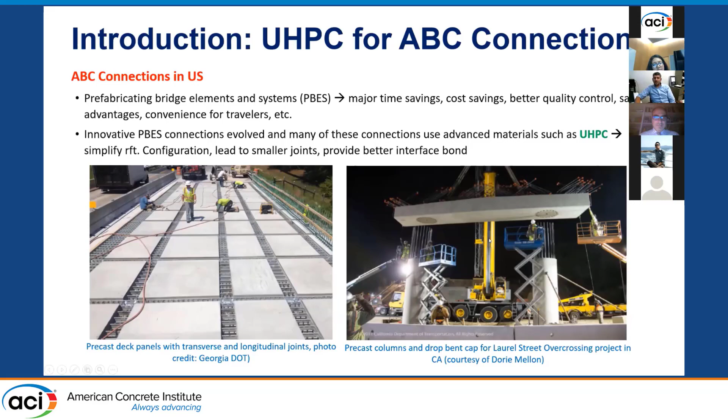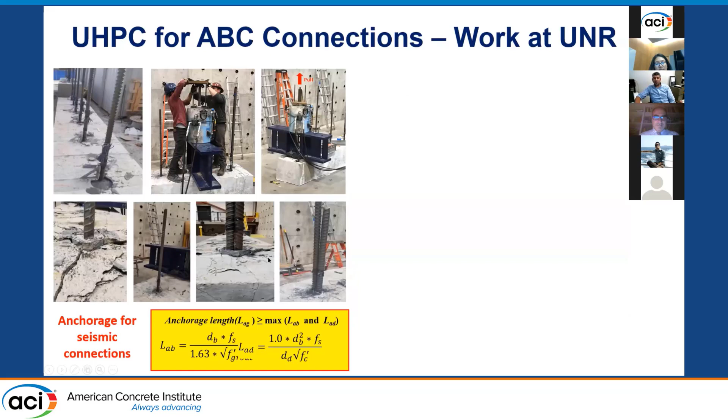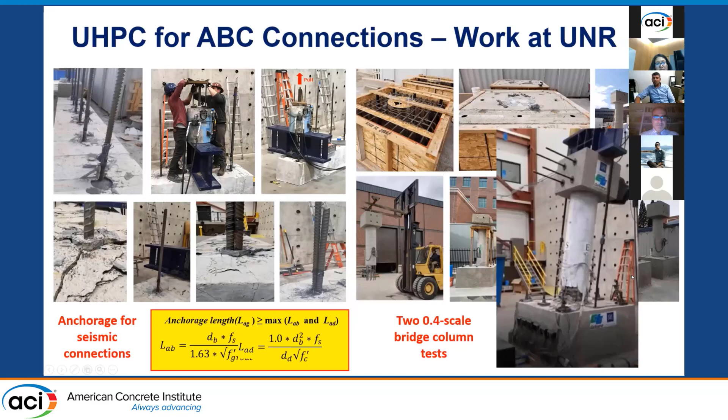At UNR, we did a lot of work on both, developing non-proprietary UHPC specifically for Caltrans for this type of joint, where we did anchorage testing specifically for large diameter bars up to number 10. We developed an equation for the anchorage lengths, then used this for 0.4 scale columns, and tested them to make sure the column would develop the plastic hinge as intended. That's one example I'm not going to talk about today.

The other type of connection we are working on is the non-seismic or bridge deck joints. I'm starting here from the end of the project, before going to the material part. What we eventually got to is that we had 9 pairs of precast sub-assemblies of bridge decks with transverse and longitudinal joints with different designs, detailing, and materials.

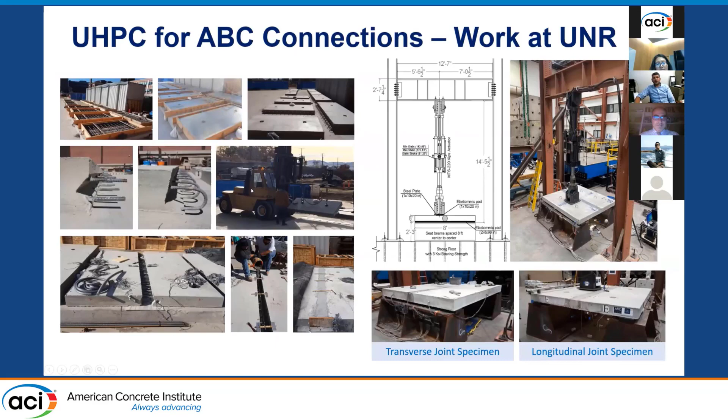I'm sharing one example here to show the comparison between a non-proprietary and a reference commercial UHPC. We know commercial UHPC works great, but for research options and the bigger benefit of the community, we wanted to show that other options would work as well.

That's a head-to-head comparison, exactly same dimensions of the specimens. The only difference is that we used non-proprietary versus commercial UHPC in the mix in the joints, and we showed that the non-proprietary or engineered UHPC could lead to good behavior. So that was the end of the project.

But let me go back now, a year or two before we reached this stage, to where we wanted to develop the material itself and see what type of non-proprietary UHPC would work for this application.

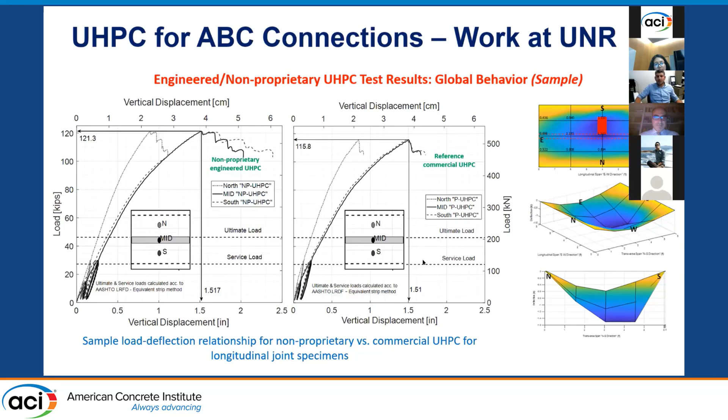As I mentioned, it's a multi-institutional collaboration among the 5 consortium members of the ABC UTC. This work was led by the University of Oklahoma in terms of the basic or reference non-proprietary mix for the UHPC, and then each university took on a separate role. University of Washington, for example, focused on shear panel testing. Here at UNR, we did full scale sub-assemblies of deck joints, as I mentioned.

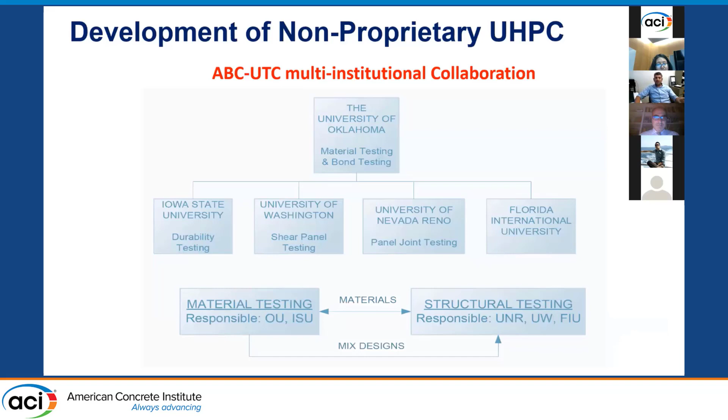Along the way, we found that it's beneficial to do some side material study, which I'm going to share with you today. So we got the material.

Our objectives were to get the materials and the basic reference design from Oklahoma, and we wanted to reproduce the exact non-proprietary mix using not only a different team but a different mixing procedure. Everything is different because that's a separate team from the original design. So we wanted to see the repeatability and reproducibility of this mix.

On top of that, we also sourced materials locally from the western part of the country, from Nevada and California, wanting to study how material sourced from the western side of the country would lead to comparable results or not from what Oklahoma designed for the reference one. So we wanted to study the effect of material sourcing and variability, specifically the fine aggregate type and particle gradation, which I will show.

And the other thing is, even if we are using the same material that our collaborators at Oklahoma used, can we reproduce it if we are using different people, different mixing, and just see the human factor - does it reproduce or not.

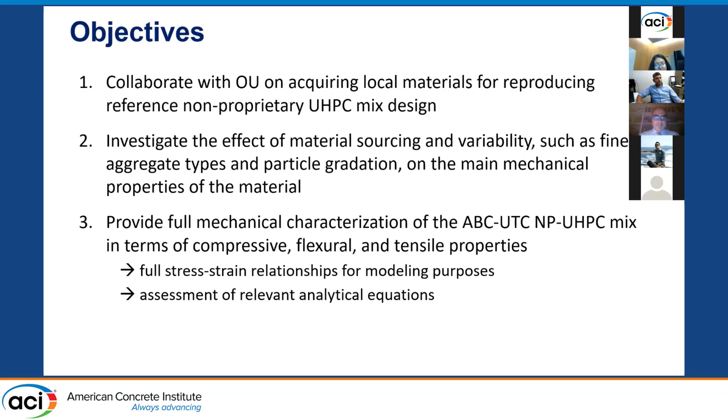And then we did a full mechanical characterization for what we call the ABC UTC non-proprietary UHPC mix, in terms of compression, flexure, and tensile properties, for those who are interested to use these results maybe for modeling purposes or assessment of relevant analytical equations and so on. So that's the non-proprietary UHPC mix.

And then we used steel fiber, 2% by volume for the basic one, but we also used 1% as well to show that you can even go with less steel fiber for these applications, specifically for the ABC-UTC bridge deck connections.

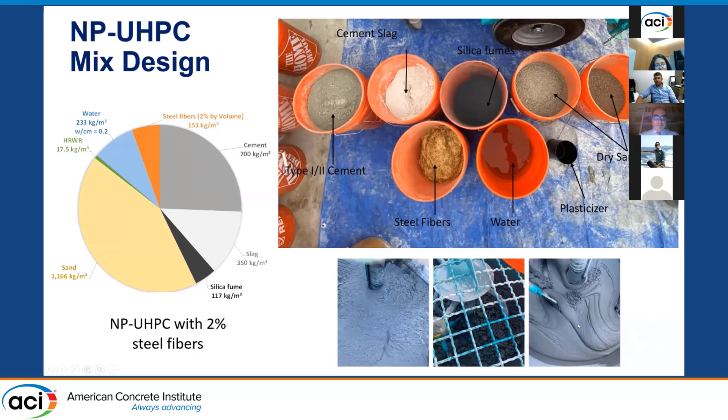So this is some general information about the mix. This is how you see it close to final state, before we furnish the material and so on.

So for the material variability, these are the sources that we used for our material. University of Oklahoma, as I mentioned, are the ones who started the mix design, and they provided us already with the materials that they have used. But in the meantime, we tried to source similar materials locally here in the western part.

So the cement we use is from a Nevada company here, the silica fume and the slag we got from Sacramento. And the main part is the aggregate. We used different types of aggregate here, but I'll just focus today on the crushed aggregate that we have used, because we tried using sieved and unsieved, and again wanted to see if this could lead to similar results or not.

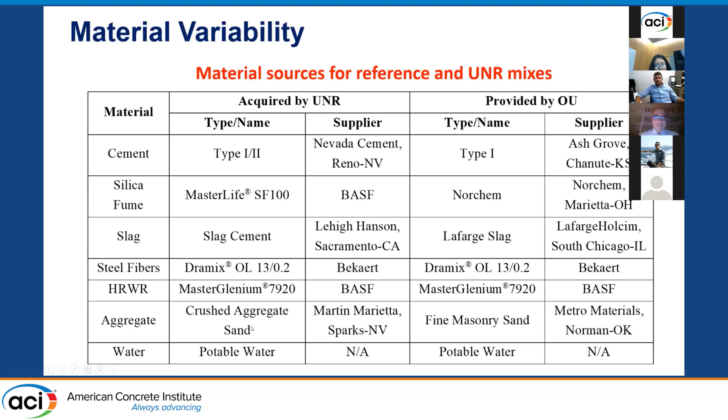For steel fiber, as I mentioned, we varied this as well, 1% and 2%, not because we are trying to walk away from high steel ratios of steel fiber or anything, but we want to show that steel fiber can be one of the components that can be optimized or engineered based on the application.

So in this example here that we did in this testing, we tested, for example, using the non-proprietary UHPC, 3 different joints for the transverse field joint as a sample here. And we wanted to see if we were to use 1% instead of 2%, from just some back of the envelope calculations and stuff like that.

We said that maybe this would come at the cost of increasing the width of the joint a little bit. So instead of the traditional 6-inch width we use for the joint, we went here with 8 inches. Not really a big difference, but we wanted to make sure that at least for 1% we have a little bit more lap length, and we wanted to test the two of them.

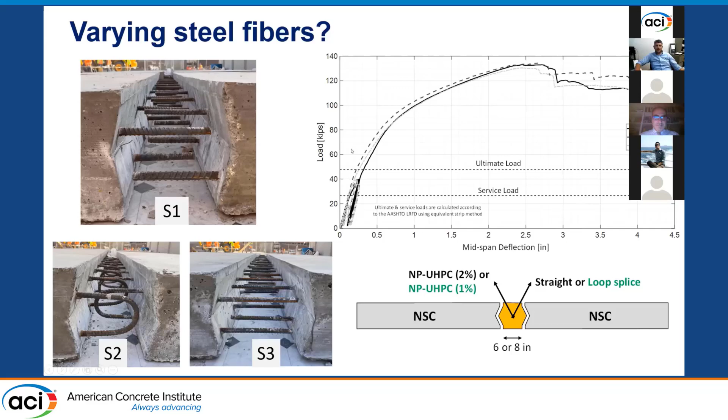The other part is the aggregate type and the particle grading. Again, UHPC - and I have heard this from several presentations today - it's all about the particle packing theory. So we wanted to show, on purpose, we are not after a 25 KSI, high-end UHPC. We want a practical mix for a specific ABC type of application.

So if we are not even going to do sieving for the sand - and you have seen here, these are very large particles - versus a sieved sand that we sourced here in the Nevada part, and then there's the fine sand that we got from Oklahoma, how these three would compare.

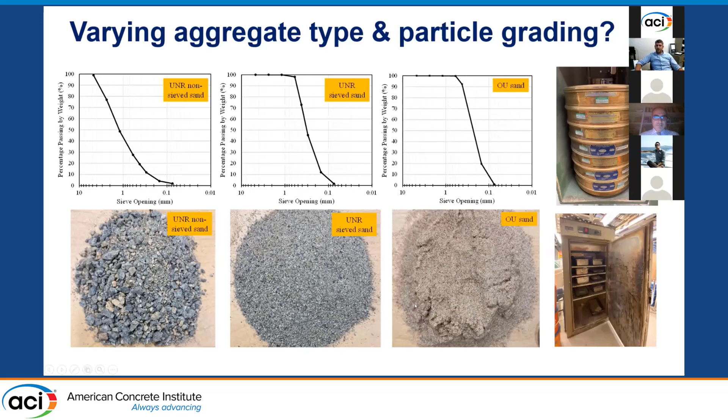So we did this as well, and putting all these things together, we had 5 batches that we tested: 2% and 1% steel fiber, using our non-sieved and sieved aggregate here from the Nevada region, and then we have the Oklahoma one, the materials that we got from them for reference purposes.

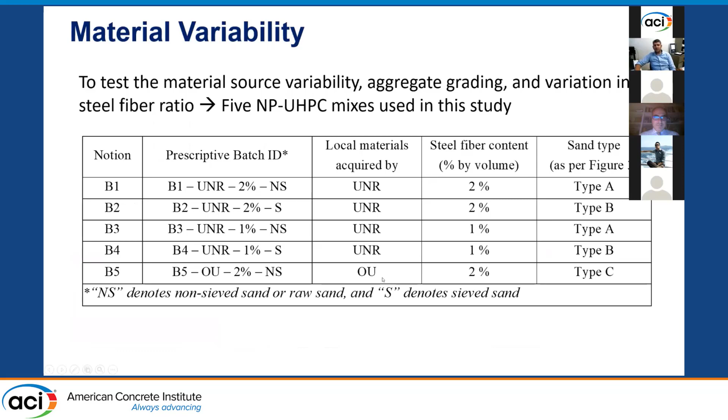And then we started our mechanical characterization campaign. We did compression, flexure, and tension. Again, you have been hearing about tension from the morning - there is no standard test yet. We are not actually after a standard test in this specific objective. Our objective is not to do the best tensile characterization, but rather do a comparative study. If we have 5 batches and we do the same test for all 5 different types of concrete, it's just a comparative assessment that we are doing here, as opposed to having a specific test that we know is maybe the standard results you would use for approving this mix. This was not our objective from the testing here.

So we went with dog bone samples with a 1x1 cross section, and the standard flexure test, we did the 3x3x12, and the compression, the 3x6 cylinders. We wanted to do the full stress strain characterization for all these types of tests and see how this would compare to analytical equations in the literature.

Most of the analytical equations have been verified for proprietary and high-end UHPC. So we wanted to see if these things are valid for non-proprietary mixes or lower-end type of mixes as well.

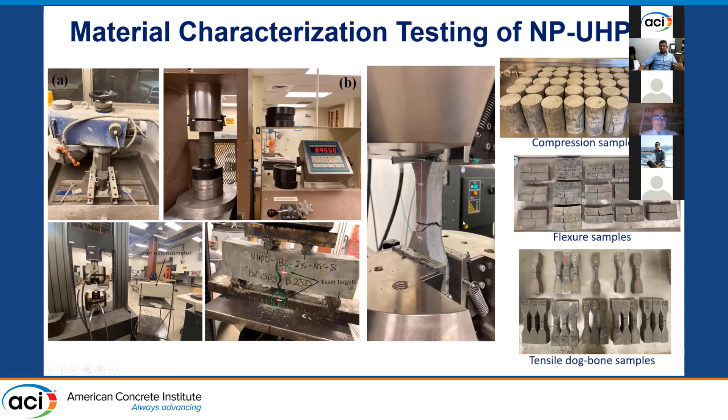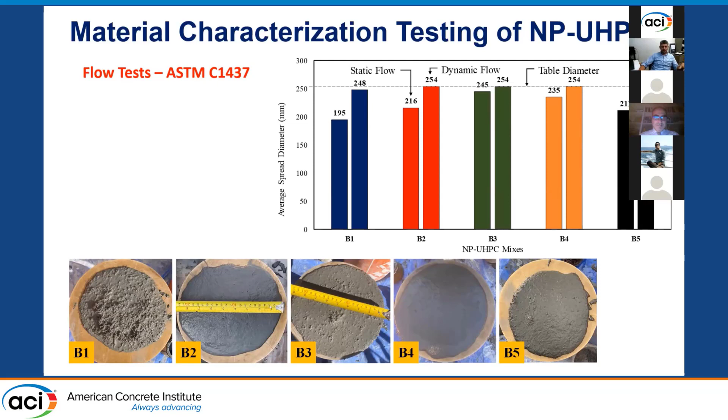So our target here was to meet the required or minimum required flow as well as other mechanical properties. Flow is not mechanical, if you can argue, but flow and other mechanical properties as well - that was our target here. They have the most practical, if you will, the most practical, convenient mix that can work for this type of joint. So we did the compression test.

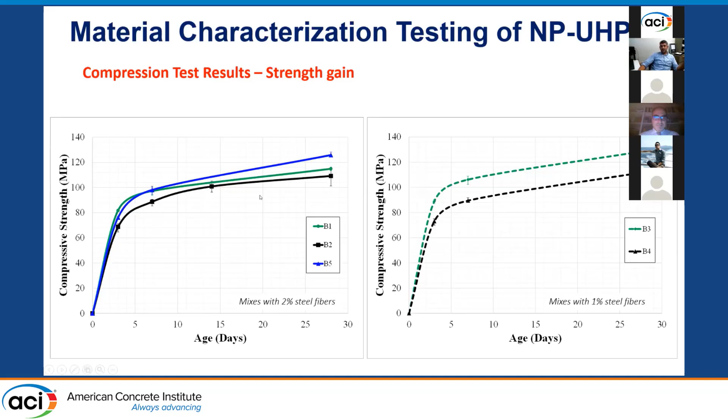So there are some results that we were able to get at standard times, like 28 days or so. Some specimens we couldn't test at 28 days and we had to wait until we were back in the labs. So for the compression, for example, the stress strain ones, we were not able to test these until almost 240 days or so.

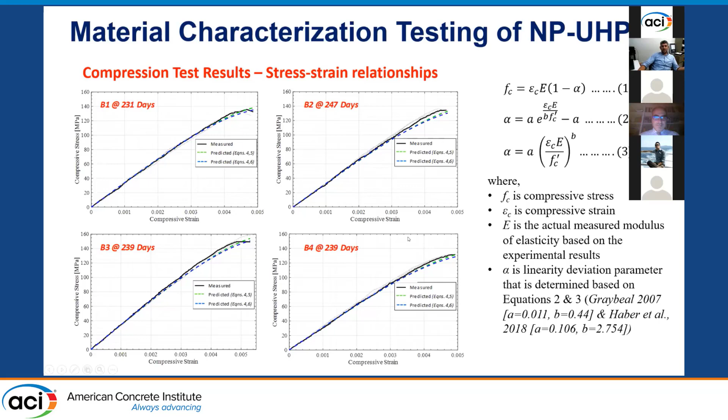But we have done this and we get at least the early part - this is non-confined UHPC and we didn't really care that much about capturing the post-peak behavior. We just wanted to at least get the initial part, which indirectly has to say something about the Young's modulus. The equations that Graybeal and the folks at the Federal Highway have proposed for predicting or estimating the full stress strain relationship in compression up to the peak - we show that this works for non-proprietary UHPC as well, and we did some assessment for the equations here.

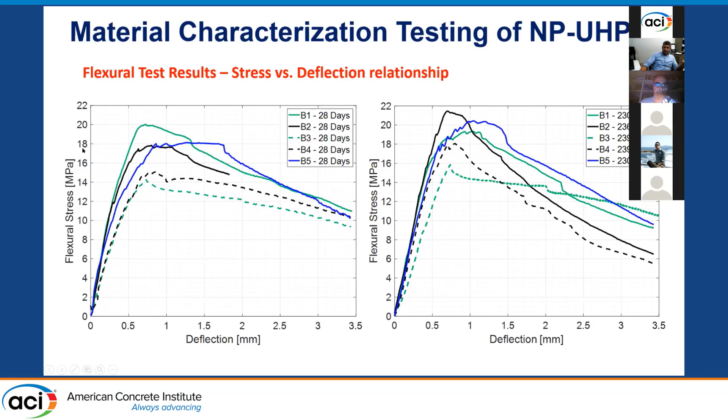You can see that in tension, it's not like compression - you don't really get a lot of change. From 7 days to 28 days, the increase in tensile strength was about 20%, which is expected and matches what we've seen in the literature, because the tensile behavior has a lot to do with the steel fibers as opposed to the UHPC itself or the cement.

So these are just some of the results here. Again, what did we want to show? The 1% and 2% obviously have different results. We wanted to show the general trend - if you focus on the very first part, you'll see some strain hardening, but we're plotting it all the way up to 5% strain to show that the ductility is there. The idea is to provide sample full stress-strain curves for this material using different batches, for those who would like to use these later on for modeling purposes or analytical assessment.

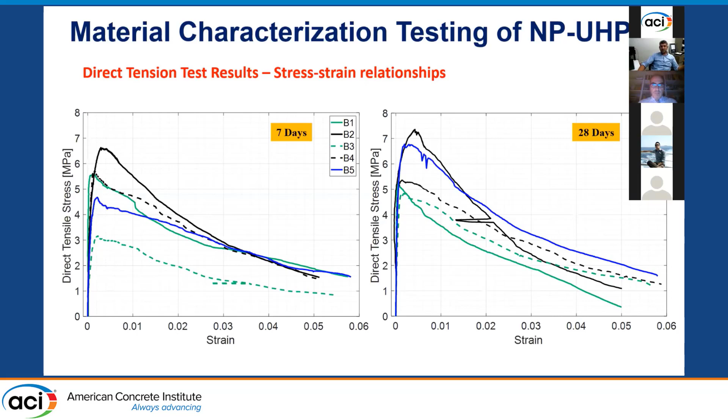So let me wrap it up with some concluding remarks. The basic characteristics of the mix designed at University of Oklahoma, based on Midwest and South US region materials, was successfully reproduced and replicated using a full independent set of materials, and even different aggregate types from Western US, which is encouraging for all these developed, emerging non-proprietary mixes. We can use different materials sourced from different places - this is one promising observation or conclusion that we have here.

The developed non-proprietary UHPC with sieved and non-sieved sand both met the minimum compression strength requirements, as far as the 117 megapascal, the lower end we were targeting. Flow and tensile properties were all met. So having unsieved sand is not really bad - we know for sure this is not ideal in terms of optimal particle packing, but at least for practical purposes, we showed that it works.

The flexure and tensile behavior both showed all the trends we're looking for - the initial strain hardening, and then the ductile behavior. As part of the ABC-UTC, this is only for this project, we don't want to make bigger conclusions yet, but based on what we've seen in this recent collaboration, we recommend at UNR that using 1% steel fiber and non-sieved sand would strike a balance between acceptable mechanical behavior and cost. Less work for sieving means less work, especially when scaling up for large quantities, and less fiber will mean less cost.

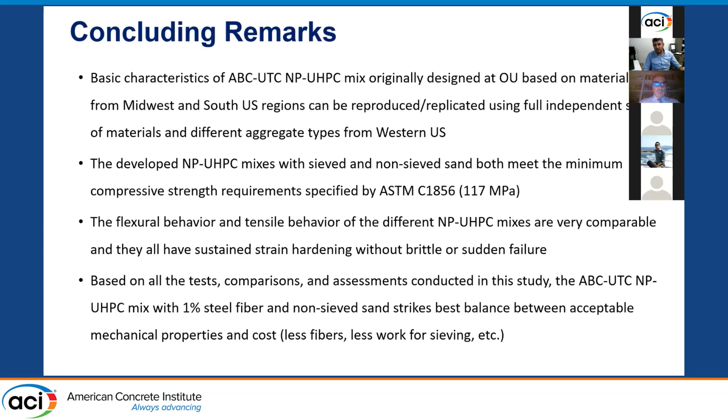So there is room to engineer UHPC based on the application. Not every application - if I'm doing columns, like what I was doing in the morning, I would use a different type of UHPC. But this is to leave everyone with the thought that it's about time to start engineering even our mixes further based on the application. With this, I would like to thank you, and I'll answer questions if you have any.

Okay, thanks a lot, Mohamed. Thanks for your talk. As with the previous one, it's interesting, and also for presentations we've seen in the first session, to say that there is not a unique UHPC. You can have different performance requirements, which will turn into different compositions. And most importantly, it's good to have locally sourced constituents, because we're speaking about sustainability, but sometimes we forget that the transportation of raw material to the batching plant also has to be considered when assessing the overall footprint.